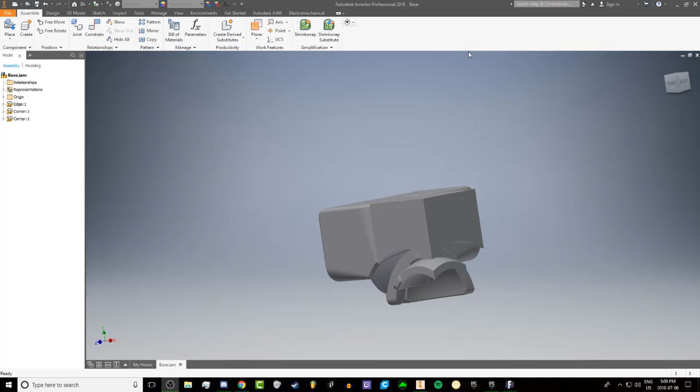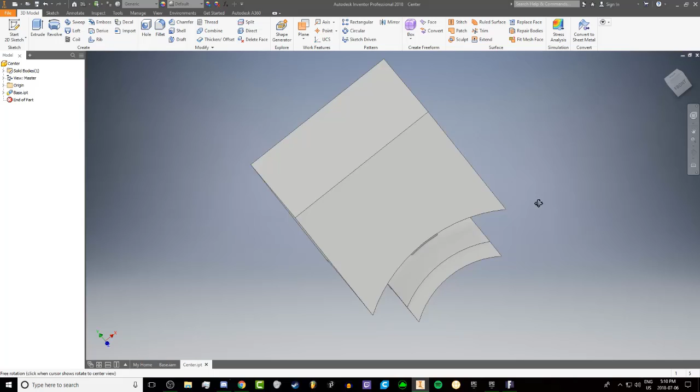Today, now that we've finished the edge and the corner, I am going to show you how to finish up the centerpiece. This is going to be a bit of a longer episode because it has two parts: first you have to finish up this whole piece, and then separate it into the main part of the centerpiece and the cap.

Just like everything else, first thing you want to do is start with your outer fillets. With this, it's actually okay to not use a variable fillet. It's not super important, it doesn't really make much of a difference.

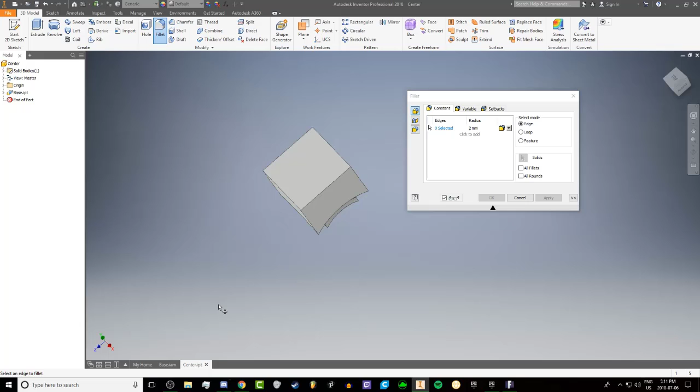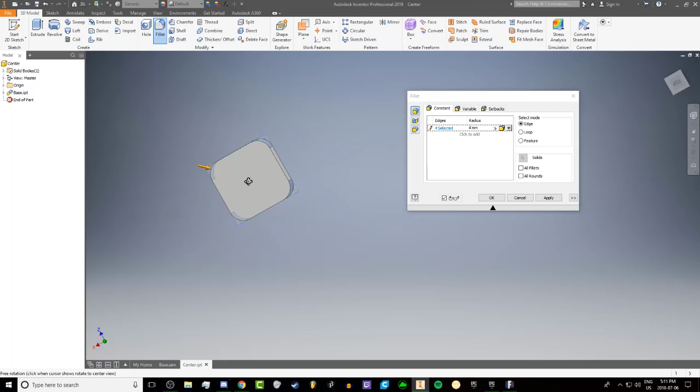What you want to do for the centerpiece is just standard rounding. I'm going to see what 4mm looks like. Actually, I'm going to go ahead and use 5 - I think 5 is nice. It's not too round, but it's fairly round, and it helps with reverse corner cutting and all that. And just like everything else, I'm going to round this part with 1mm since it doesn't stick out much, so that's a nice number to use for the other rounding here.

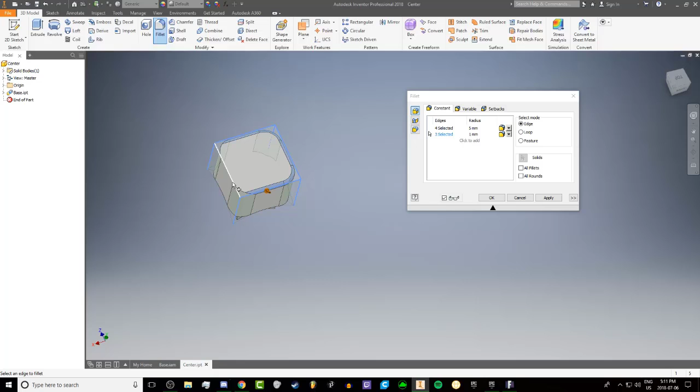Depending on how you print this, it's not going to make any difference, and chances are it's going to be completely flat, but it's nice to do anyway. So before I hit apply, I'm going to put a nice 0.75mm fillet on these 4 lines here, and hit apply.

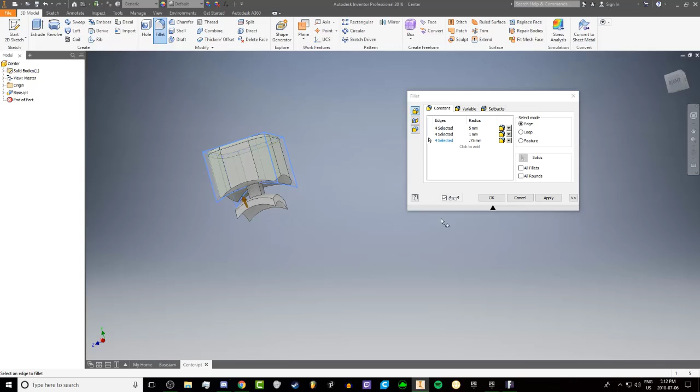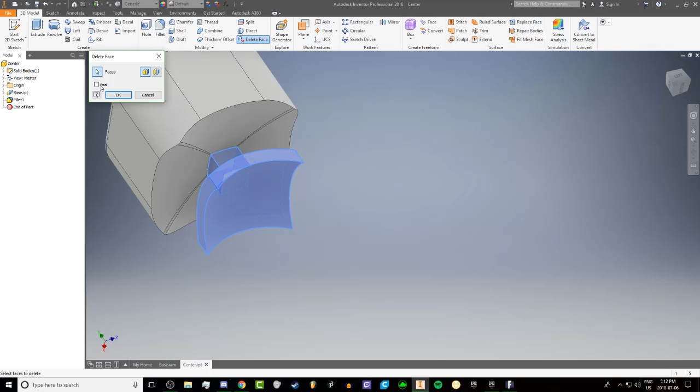Now, before I continue with any of this, you need to use delete face and make sure you remove all of these faces here, because they are not necessary. You don't need the stock, you don't need any of that - you can get rid of it and it causes no issues. Then check heal, and there you go.

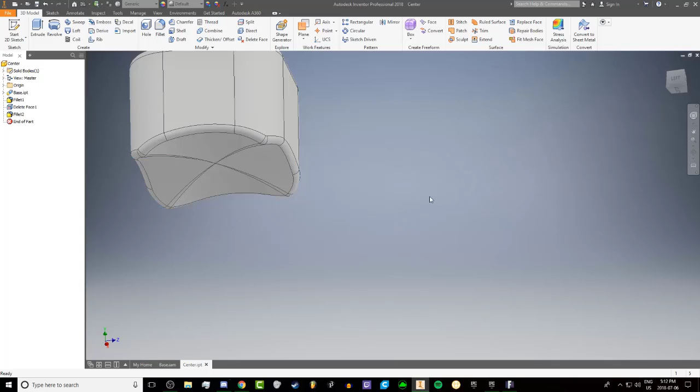There's one more fillet which needs to be done, and that's just this outer fillet, for which 0.75 should be probably good. I'm actually going to go back into fillet 1 and change this underside fillet to 1mm as well. There we go, that's nice - that should be a good centerpiece. So I'm going to go ahead and save that.

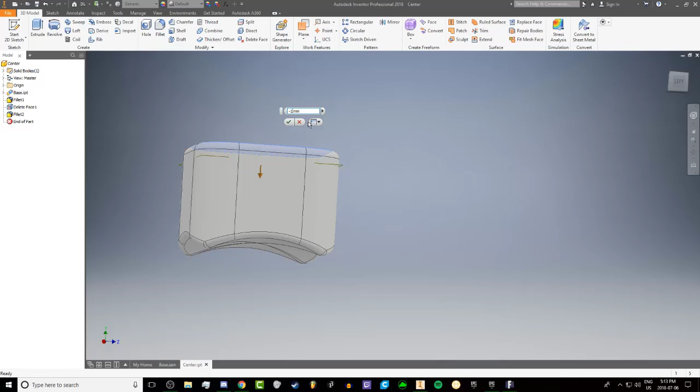Now the next step, you need to use plane, offset from plane, click this, and bring it down by about -2mm - that should be about the thickness of your centerpiece. I'm going to go ahead and do 1.5. It depends on what settings you're using for your printing, because that determines how strong the cap's going to be, but I think 1.5 should be fine.

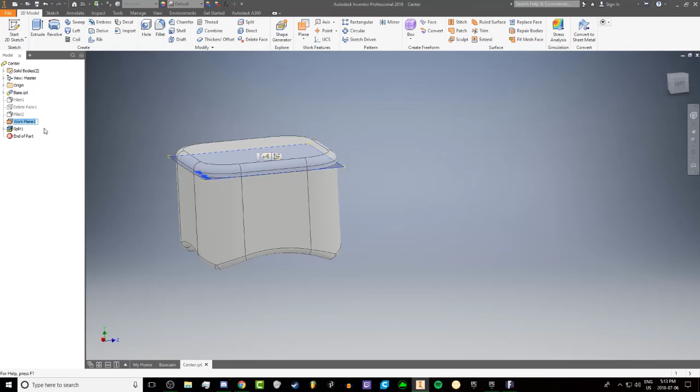The next thing we need to use the split tool like we did to make the whole cube, and just select the plane like that. There you go. Then I'm going to change this to be -2, just in case - you can still make room for the screw and all the hardware and stuff, so it's not a big deal if it's a thicker center cap.

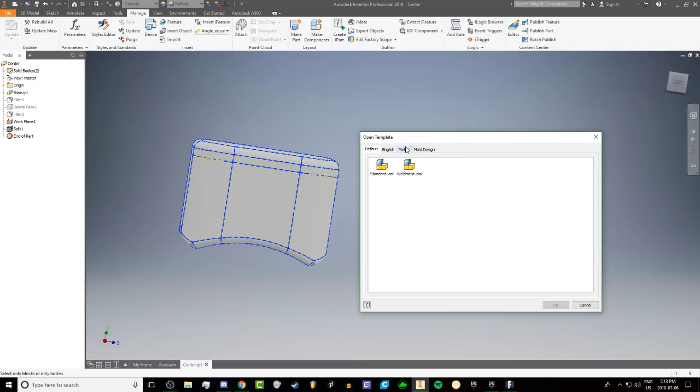Now what you need to do is manage, make components, and then select these 2 parts. You've got to make sure it's going to be called center.iam, which is the assembly file type, and make sure it's a millimeter assembly just like before. Once again, make sure the files are in millimeters as well. And there we go, just hit apply, and there you go, so that's done.

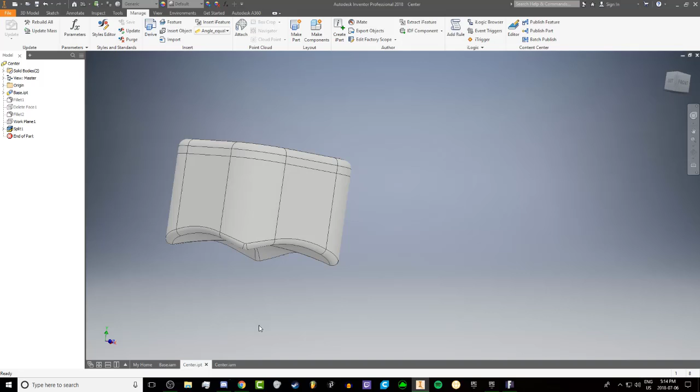For the sake of getting this out of the way, I'm going to make that work plane invisible. So now we have the assembly where we have the cap and the main body separately. I'm going to just save it - they're going to be called solid 3 and solid 2 respectively. So I'm going to go ahead and open up the center cap first, like so. Here's the center cap, and as you can see, this clearly is not going to be doing a whole lot right now.

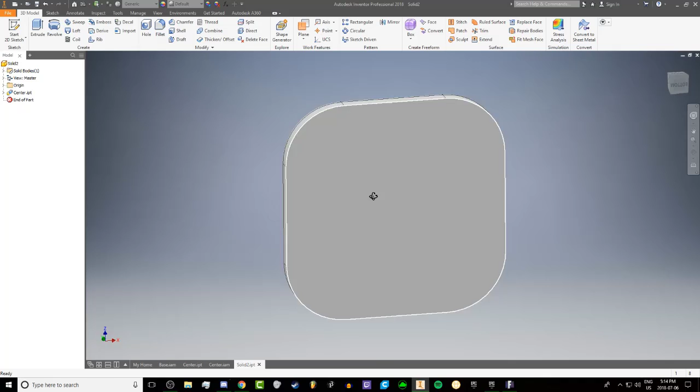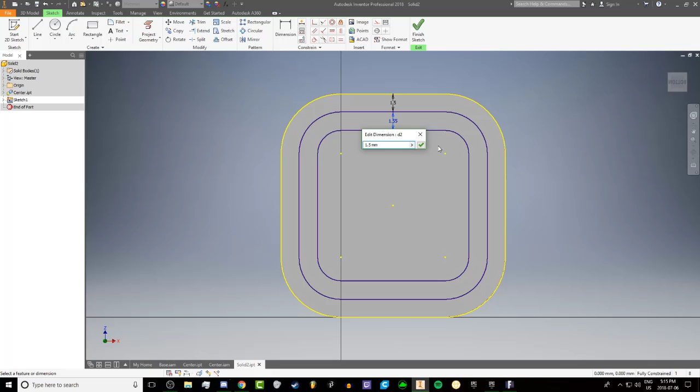So we need to, on the underside, make a new sketch. Then what I'd like to do is project this geometry and offset it by about 1.5mm, and then offset it again by like 1.5mm. Whatever you want, it's up to you, but this is kind of a nice setting, and you can fiddle around with it and see what works best with your printer.

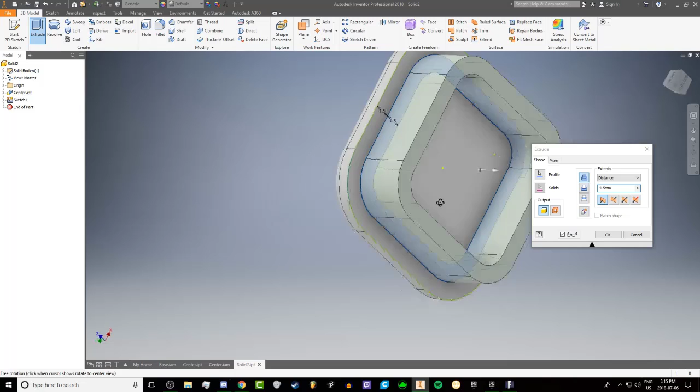So that's that. Then all you need to do is extrude, and I'm going to go with like 3mm - nah, it's a bit short. 4.5 should be nice, yeah, there we go, that's a nice length. So there we go, 4.5mm for that centerpiece. And that's it, so that's the center cap done.

So we can just save that. And now we need to go into Solid 3 from the assembly. Open it, and now we need to do a very similar process here.

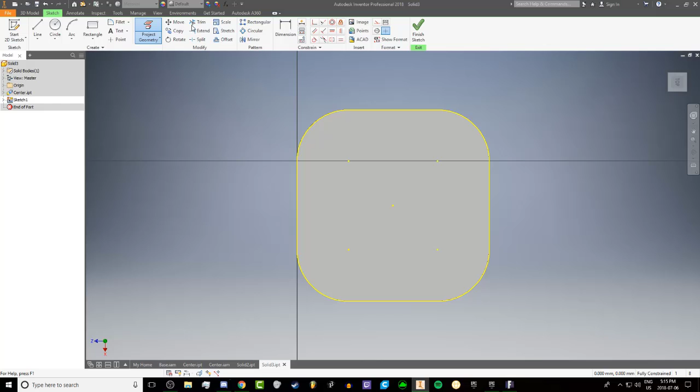Project the whole face, offset it by 1.5, and then that's it, because you don't need that weird rim thing in this. So you just need to get rid of all the material. And in this case, you can go a lot deeper, but you need to make sure you don't go too close to the bottom, or else it's going to cause issues with strength.

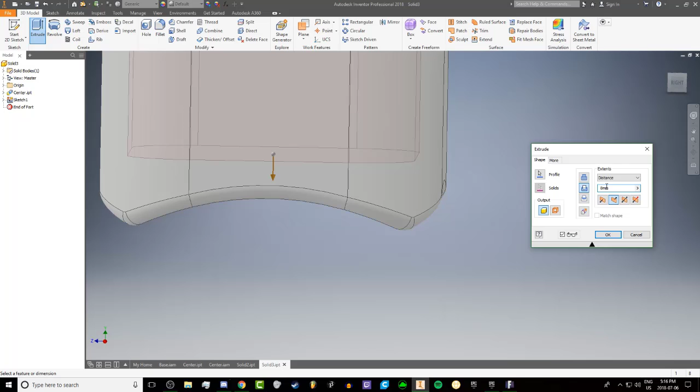So I'm going to go ahead and use 8.5, which will leave 1.5 millimeters of thickness. A little bit more than that's probably fine as well. So if I use 8, that'll ensure that it's not going to be too weak, and there's about 2 millimeters of room. So there we go.

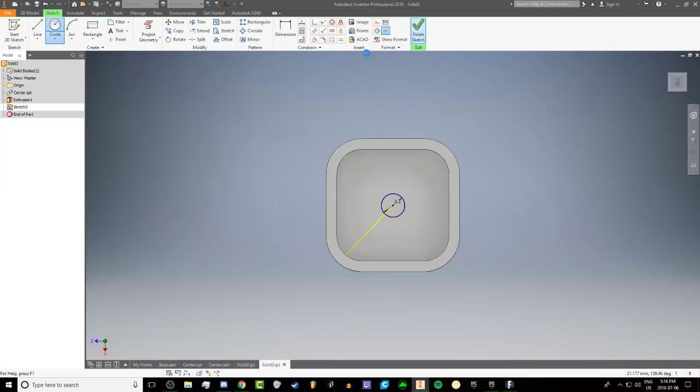So just hit OK there, and that's that. And then next thing you want to do is make a hole for your screw, and all you need to do for that depends on what screw you're using. I'm using 3mm screws, so I used a 3.3mm hole to leave room for it. Just go ahead, extrude, click that, and make it go a long enough distance. You need to make sure it goes all the way through.

We'll also increase this a little bit. There we go. That's nice.

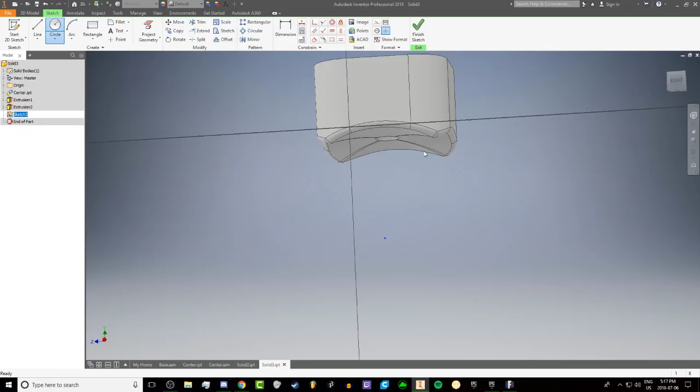So now one other thing you can do to make this a little bit easier to take off the cap, because right now there's no way to get into this, is go ahead and on this plane here, just make a nice rectangle. Make it about 2.5 millimeters or so, probably 2.25 is fine. And then make it about 5, that's probably good. And just make it an equal distance from one side to the other side.

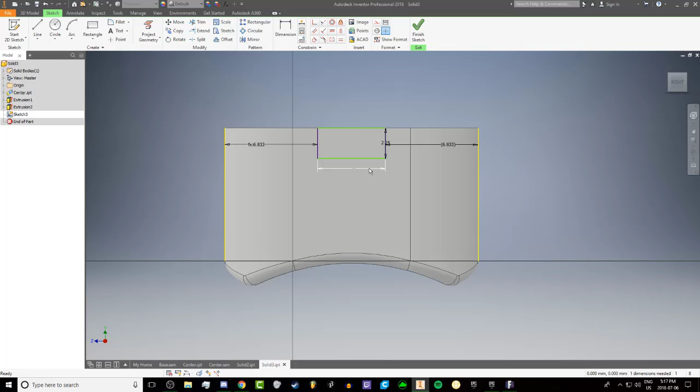There you go, and then we just do this here. That should be good to help you take off the center cap. That might even be too much, I'm going to reduce it to 2. And I need to make sure that it is in line with this line here. There we go, and then you can extrude it and make it go all the way.

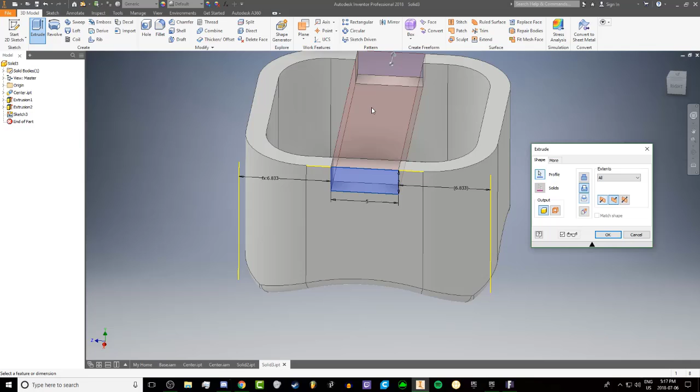There we go. So that's going to make it - well, I like to do it on only 2 sides. If not, you can use a circular pattern, select that, and make it go around the axis 4 times, which I can show you by doing this - rotation axis, and then you just say 4 and hit apply. But I'm only going to do 2 notches. And then just go ahead and hit save.

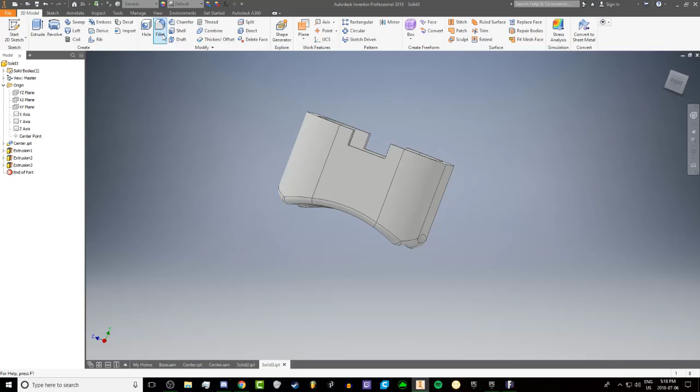And if you want as well, it's always a nice idea to round these off a bit to make them not super painful to touch. So probably 1 millimeter is fine. And that should be fine.

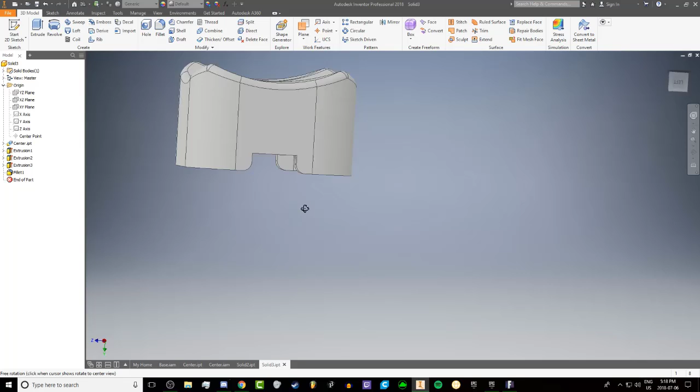So there we go. It's important to note that when you're printing the centerpiece, these areas can cause some problems. It can be pretty annoying to get supports out, so be prepared to deal with that. The thing is, in this case of the notch, I made it a bit bigger than normal, so it probably should be fine, but I'd have to wait and see.

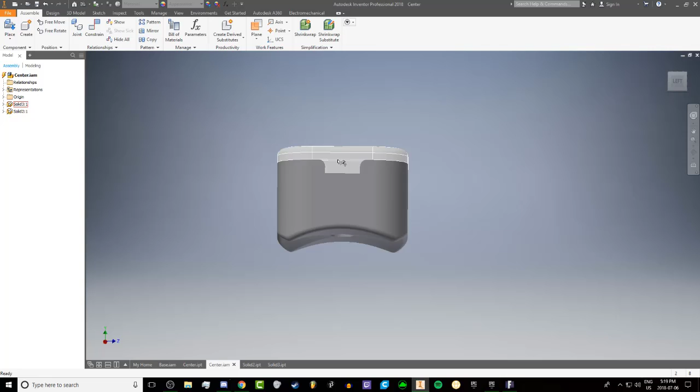But anyway, that should be about everything. We can see, if we update this, we have the notches and the center cap in there quite nicely. So there we go. That should be easy enough to remove.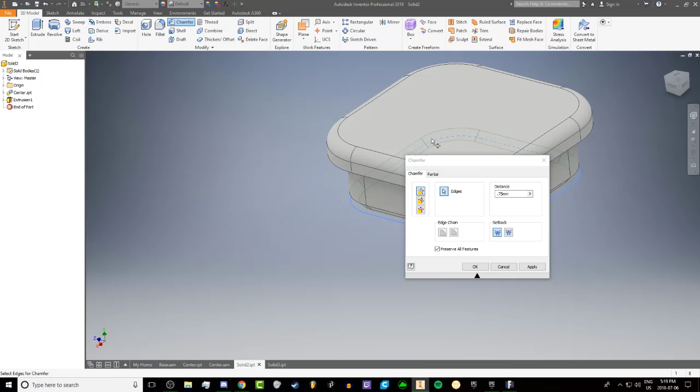And as well, if you want, you can chamfer this a bit so that it can be easier to insert. If you print it with this on the build plate, then you can have a chamfer there and it will help out with that kind of thing.

But anyway, if we save that, there we go. That should be - I'm going to make this also go a little bit more just to make up for that chamfer that we just did. So that should be everything.

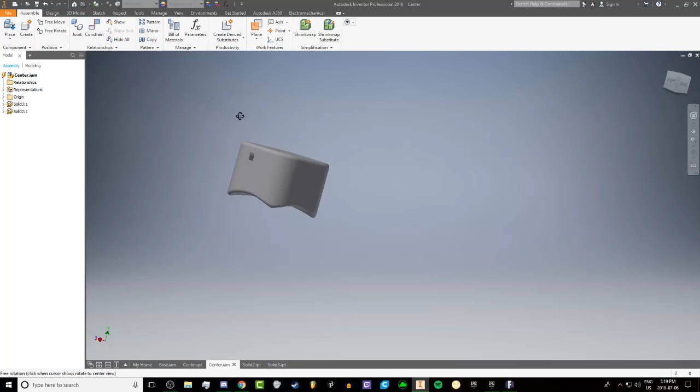There we go. Now that we have that, that's our centerpiece all done. Looking quite nice. Of course, we're not going to see that here because we made those changes to these pieces, but if we go back to here, we can still have an idea of what the final cube should look like. So this is looking, in my opinion, quite nice.